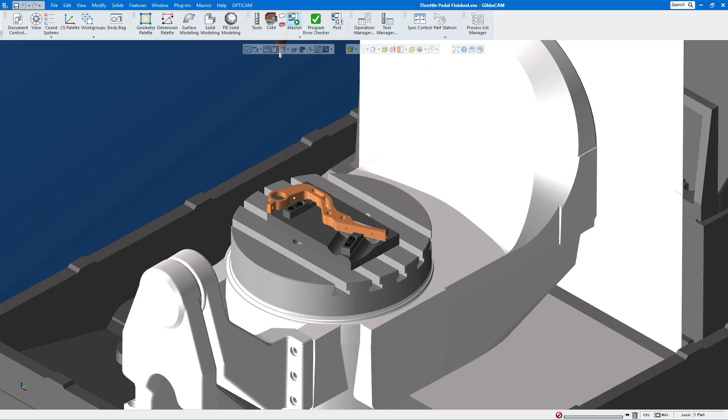In this GibbsCAM Tech Tip, we will be discussing GibbsCAM 2.5D chamfering. We'll show you how easy it is to program your parts with this chamfering process. Using this chamfering process will save you hours and hours of hand deburring on your parts.

Okay, so here's a very simple part, and that's what we're going to start off with. And this is pretty typical. You might want to put chamfer around these holes or maybe around the outside. So something very common, but something very simple. Okay, so let's go ahead and create our tools.

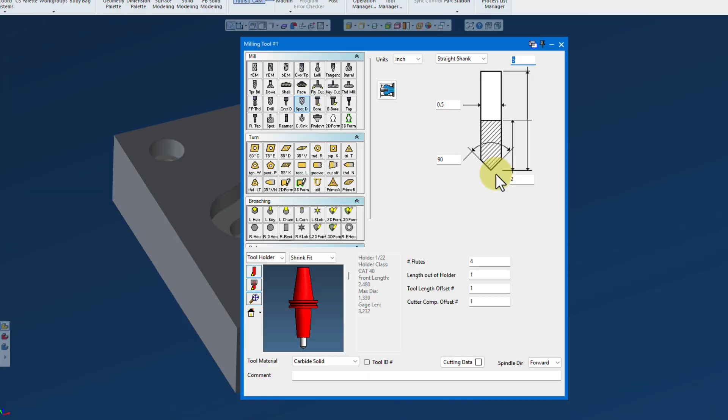First thing we're going to do here is create a tool. Create a 1/2" tool with a 90-degree included angle. You can make it whatever you want, which is really nice. The software will pick up on whatever angle. Here we're going to use 90, so we get a 45-degree chamfer. Okay.

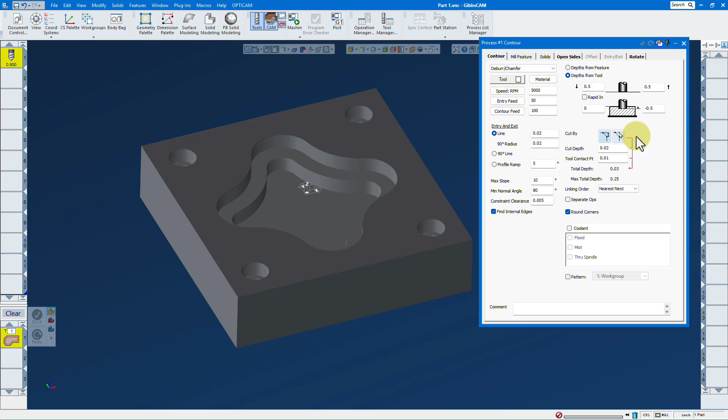Next, we'll bring this down and we'll select contour. And now in the pull down, we have deburring and chamfering. Okay. So here we set our clearances, whatever we want to set our clearances to be. Start, and then the depth that we want the software to see how deep we're going to go. So it looks at all the areas up to a 1/2" deep.

Then we're going to come over here. We can set edge depth or wall depth. The cut depth, so we're going to have a 20 thou. And then the tool contact point, so the tip of the tool is 10 thou past the depth. So total depth of 30.

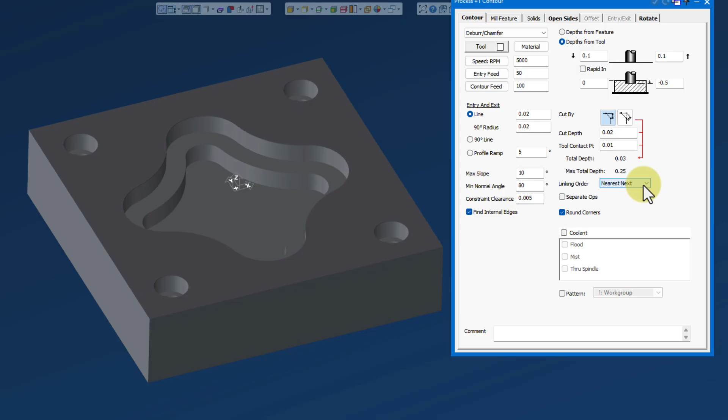Then we're going to do nearest next. So the linking order, however you select them. You can do it horizontally, vertically, or by selection. In our case, we're just going to do nearest next. Now, we're going to go here and we're going to do our face selection, and we're just going to select the faces. Now, this is one way of creating the tool path for the part. So again, quick, simple, and easy.

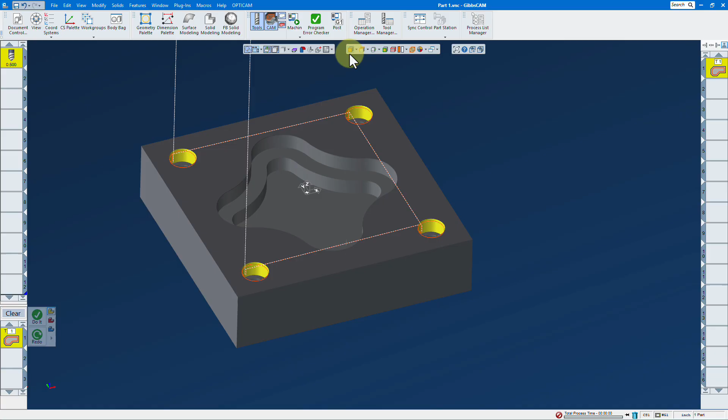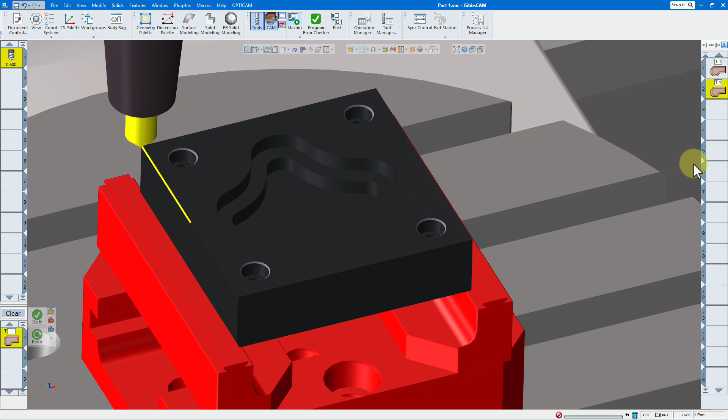Okay. Now, the next way we can do this is we're going to turn on the edges. So as you can see, we can do faces or edges. So you can use a face selection or edge selection to generate the tool path that you need. We'll render this, and you'll see that it's going to come in and chamfer. Again, this is a very simple part, but it's very common. Quick and easy. This will save a lot of hours of bench hand deburring.

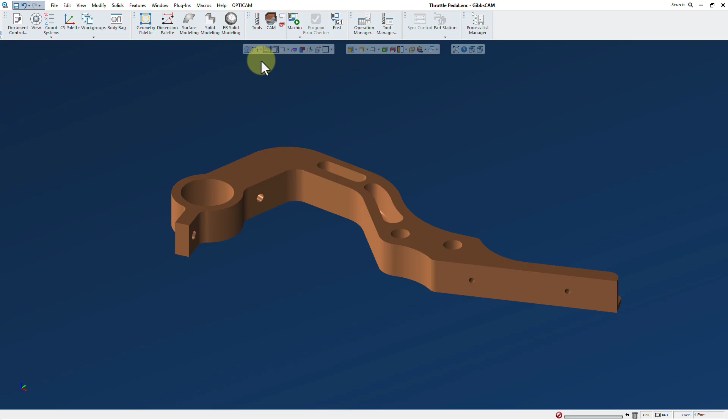Okay, so this part's a bit more complex. Holes, slots, a lot of different things we're going to chamfer here. So let's go up and we'll put on our tools and our process. We'll bring our tool down and go to our contouring process. We'll make sure we're at deburr and chamfer. We'll set our clearance value. Again, how deep we want it to look. And all these things look reasonably good.

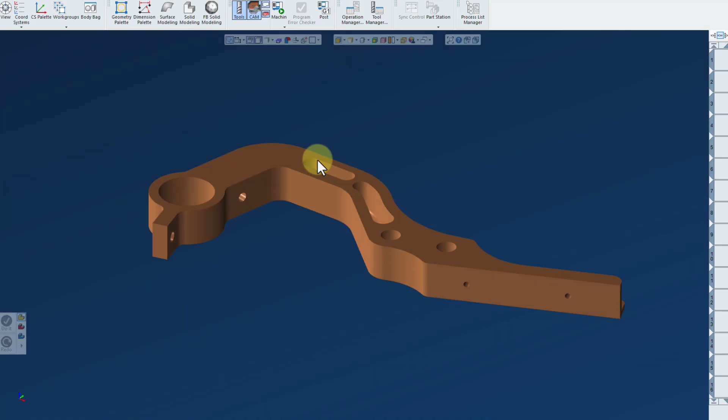So in this case, I'm going to pick the top face and say do it. And because I picked a face, it does everything on that face. So again, quick, easy, simple.

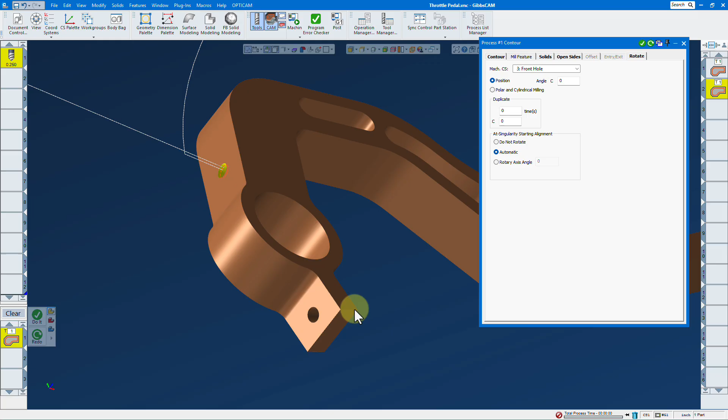All right, let's do these other holes here. So here I'm going to go to the rotate tab. We'll switch the coordinate system. And again, I can either use the face selection or the edge selection. And you can see that all I'm doing here is just picking the faces. I could use the edges. So again, quick, simple, not a whole lot of work.

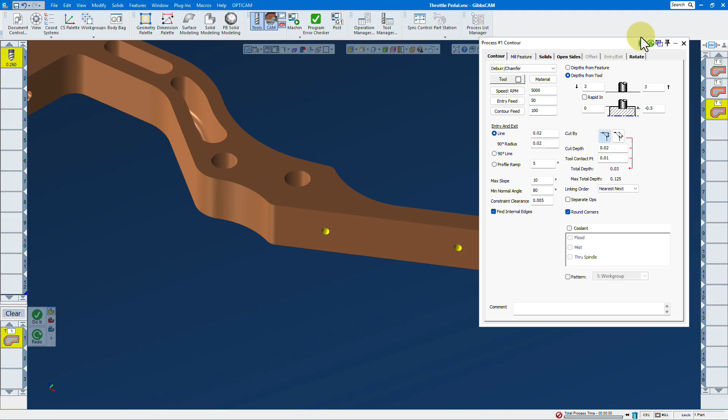All right. We'll go up in here. We're going to change the clearance. I'm going to come to fixturing, and there you go. Okay, so the whole part, chamfered, deburred, however you want to say it, quick and easy.

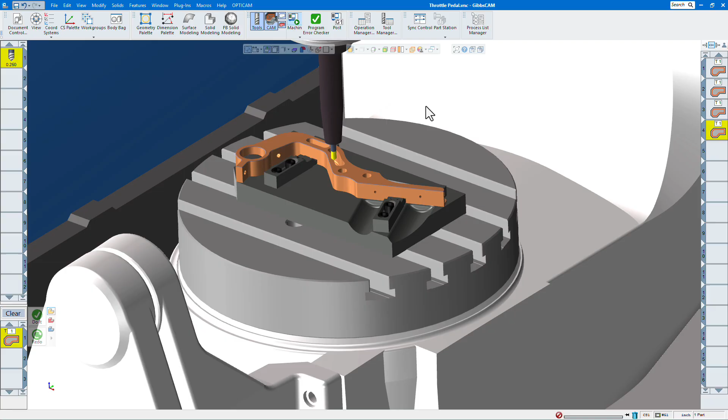Okay, so let's go in and have a look at this. So you can see it's nicely done. We're going to come in without having to do anything and deburr, or chamfer, the entire part. Remember, it's quick, it's easy, it's fast, and it'll save you lots of time hand deburring your parts.